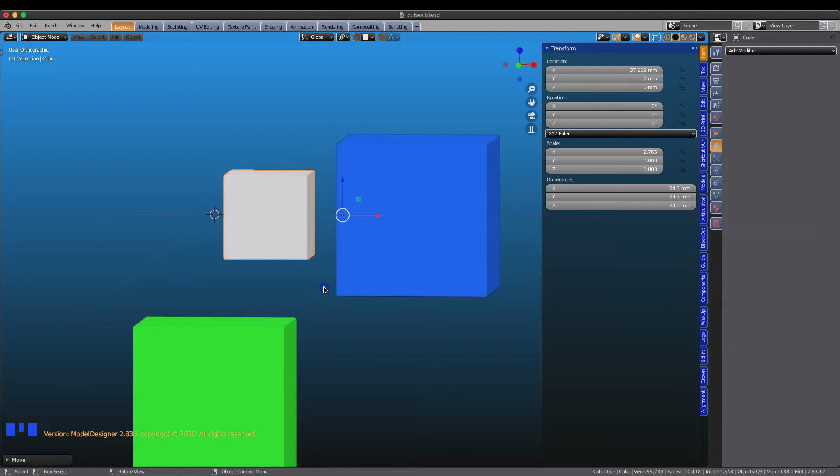We have previously shown how the integrity of the mesh is severely compromised if one Boolean cut is made on top of another Boolean cut. This led to inverted normals, and any further attempts of cutting the object again have failed. In this first example, we will demonstrate how to remedy an object which has been inadvertently cut twice. The object will have to be remeshed in order to restore its mesh geometry.

Let us begin. We will first create an object with inverted normals. To do this we will apply a Boolean difference between the white cube and the blue cube twice. This kind of error can easily occur while doing CAD work. With the white cube being selected, we will access the Boolean modifier in the Properties window. With the dropper we will select the blue cube. Essentially the blue cube will cut the white cube.

To finalize this, we will apply the modifier. The cut has been made and this can be verified by moving the objects apart. We will use Ctrl and the Z key to go back a step. The objects lie face to face against each other, and there is no longer an intersection between object A and object B. We will now proceed with a second cut by repeating the procedure.

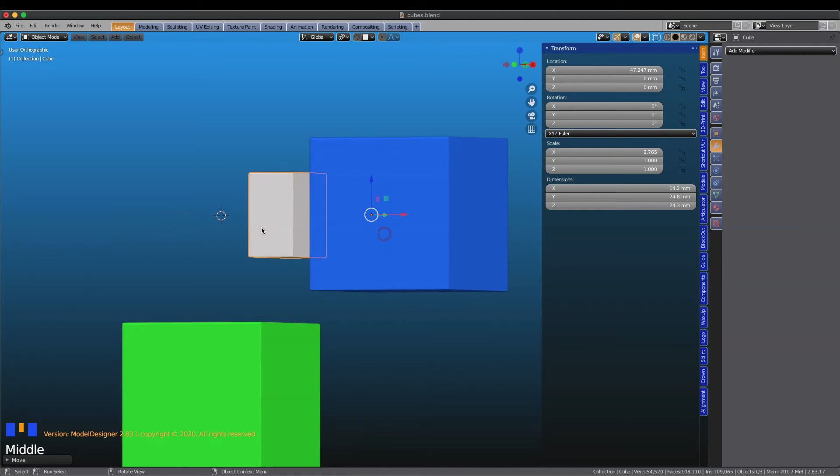When the objects are shifted apart, you will immediately notice a random disarray of orange lines in some areas of the cube. By using the Face Orientation checkbox, you will see the inverted faces. In fact, this cube will fail to perform any further Boolean operations in its current state. This was demonstrated in the previous tutorial.

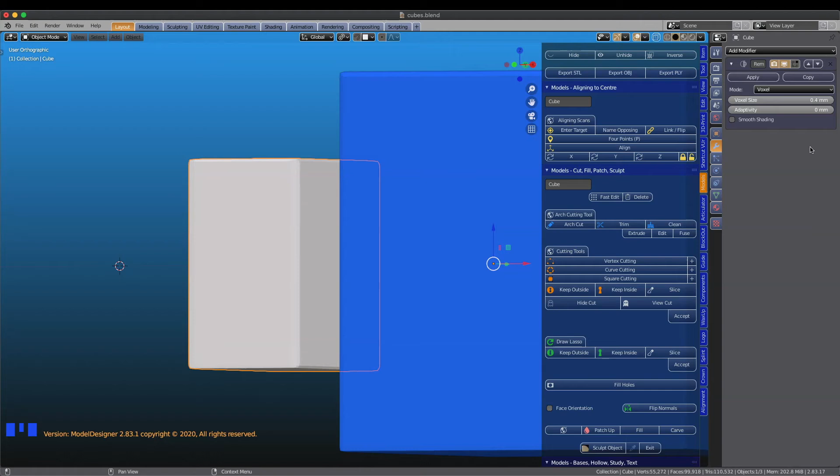To remedy the situation, a voxel remesh of the object is required. In the Properties drop-down menu, we will select the remesh function. For this demonstration we will voxel remesh the cube at 0.4 mm. We will apply this. In edit mode, notice how the vertices have rearranged themselves into a uniform quad mesh geometry. This can be easily triangulated.

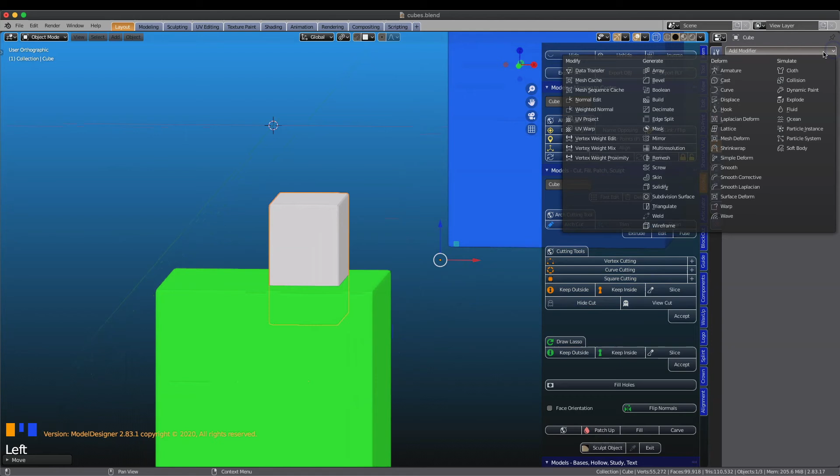To demonstrate whether this object can be used for further Boolean operations, we will lower it into the green cube to perform a second Boolean difference. With the white cube being selected, we will use the dropper to select the green cube. The cut has been successful, and this can be verified by moving the objects apart.

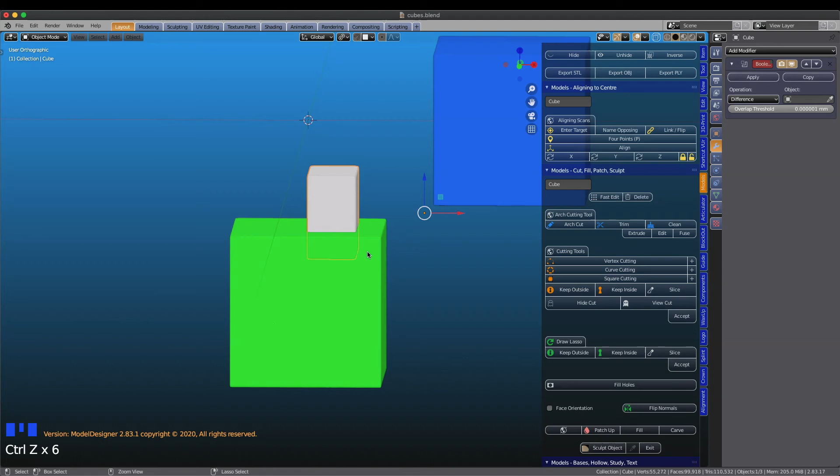Let us move on to a second example in which remeshing might not be the best solution for you. For example, you may want to hold on to your surface topography of an object. We will reverse all procedures by using Ctrl and the Z key. We are back at having made the first cut. If a new cut is to be made on the same white cube, it becomes necessary to move the cube back into the blue cube by the tiniest amount.

This means a new intersection exists between an object A and an object B. This is a prerequisite for a Boolean difference to succeed. For example, this can be done by increasing the offset of one of the Blender for Dental cutting tools. In other words, by making a cutting tool slightly larger, you are essentially expanding the object and thereby creating a new intersection. To demonstrate, we will finalize the cut.

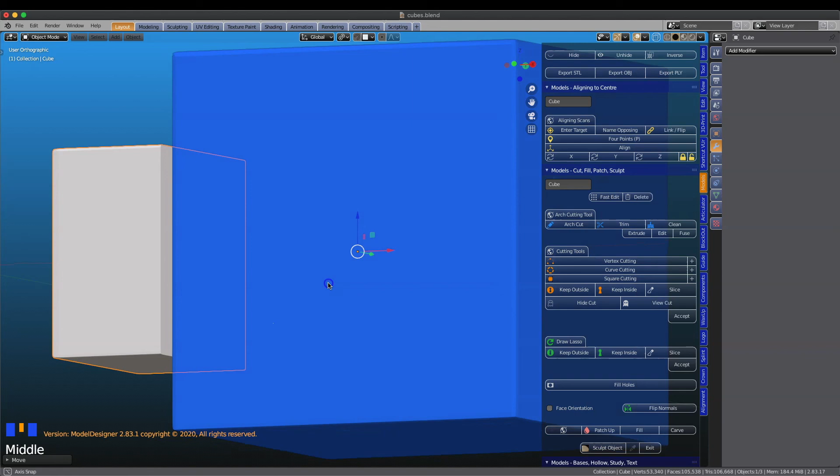In edit mode, notice how the mesh of the cube is still uniform and unaffected by inverted normals. To test whether a new cut will succeed, we will create another Boolean difference between the white cube and the green cube. We hope this video will help you understand how Boolean differences work.